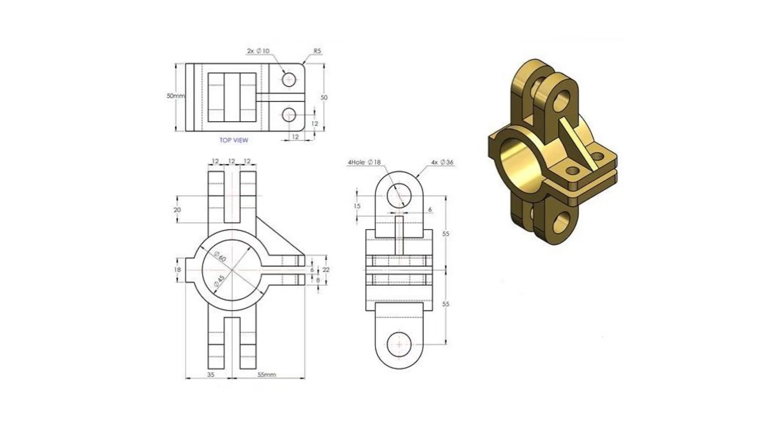In this video, I'm going to walk you through how to model this object in Solidworks, from the very first sketch all the way to the finished, colored part. Let's jump right in. We're going to start on the front plane.

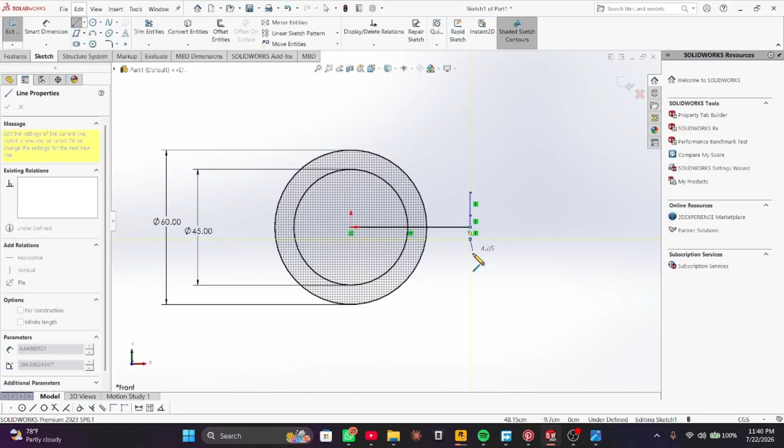Once you're in your sketch, draw two circles from the same center point, one with a diameter of 45 millimeters and another larger one at 60 millimeters. Next, draw a line to the right side of both circles. Then add four vertical lines, two near the top and two near the bottom. For the two lines closest to the center, set their length to 3 millimeters. For the outer lines on both ends, set those to 8 millimeters.

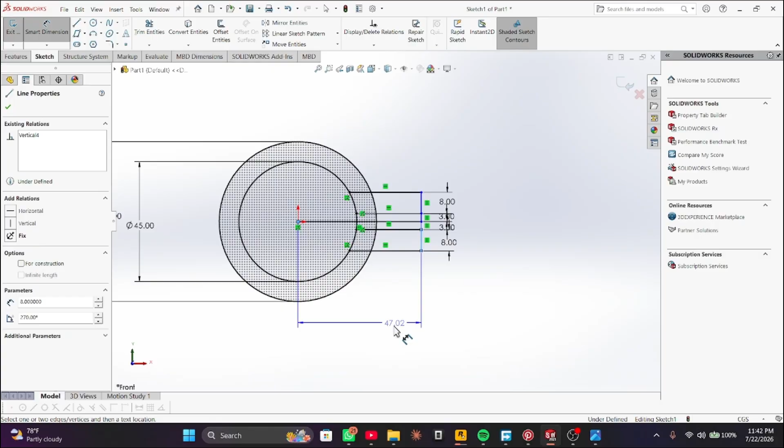Now connect the ends of each of these lines to the circumference of the circles, so everything ties together into one continuous shape. Once that's done, go back and set the length of those vertical lines, measured from the center of the circle, to 55 millimeters. This stretches the shape out to its proper size. At this point, go through and delete all the unnecessary construction lines, leaving just the clean outline of your final shape. Now we're going to add a second feature.

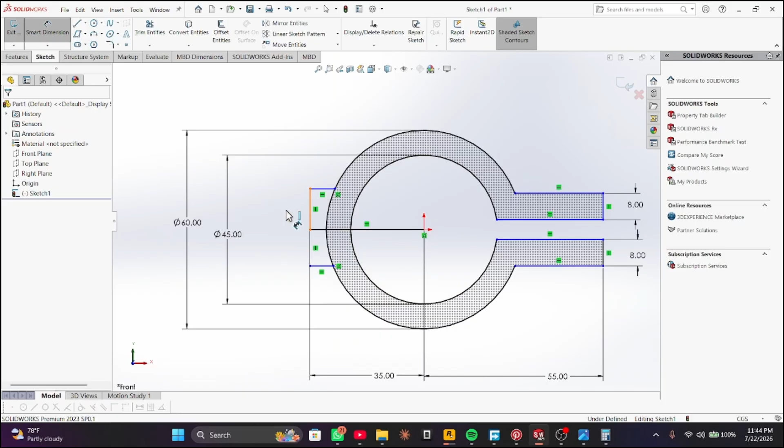Draw a horizontal line from the center, going to the left of the circle, with a length of 35 millimeters. From the endpoint of that line, draw one line going upward and another going downward. Then connect each of these to the circumference using horizontal lines. Set the height of both of those vertical lines to 9 millimeters. Once again, clean up the sketch by deleting anything you don't need.

With the sketch finished, head over to the Features tab and select Extrude. We're going to extrude this shape in both directions, so click direction 2 on the left side of the tab and set both sides to extrude 25 millimeters.

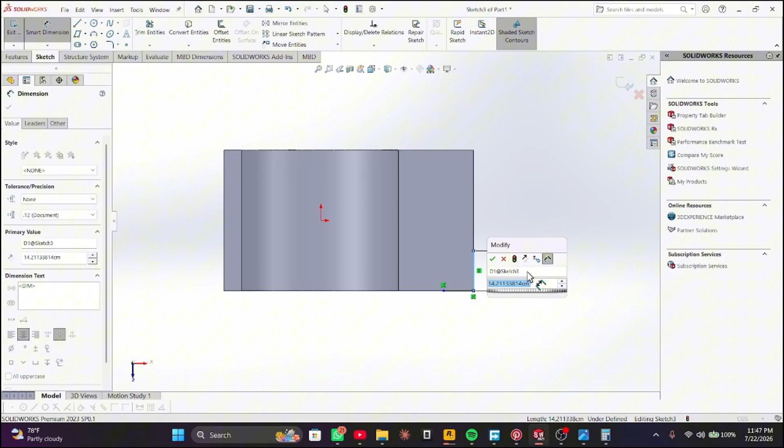Now start a new sketch on this surface. Select this edge and draw a line from the edge going to the left and another going up. Set both of these lines to 12 millimeters. Repeat the same process on the opposite corner. Now draw another line from this point and drag it until you see a blue dashed line appear. That's Solidworks telling you this line matches the length or the position of the line parallel to it. Do the same thing on the other side. At each of these points, draw a circle with a diameter of 10 millimeters.

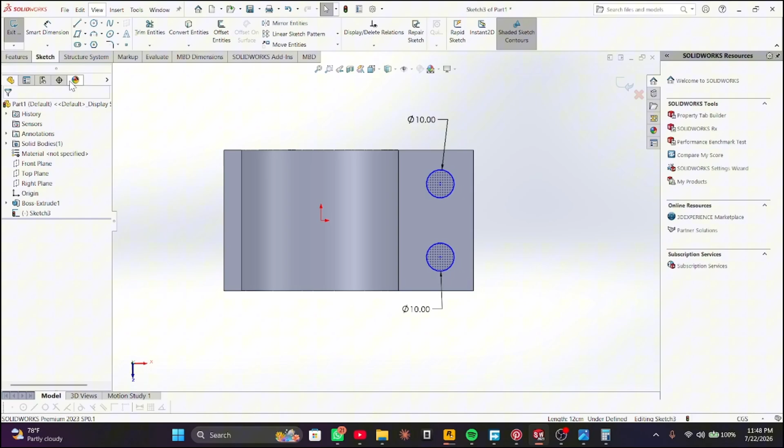Head back to the Features tab, but this time, select Extruded Cut. Use this to cut a hole straight through the object. Once you click it, you'll see a yellow arrow showing how far the cut goes. Drag that arrow until it passes completely through the object and click OK. Now select these edges and click the Fillet tool up in the top tab. Set the fillet length to 5 millimeters and click OK to smooth out those edges.

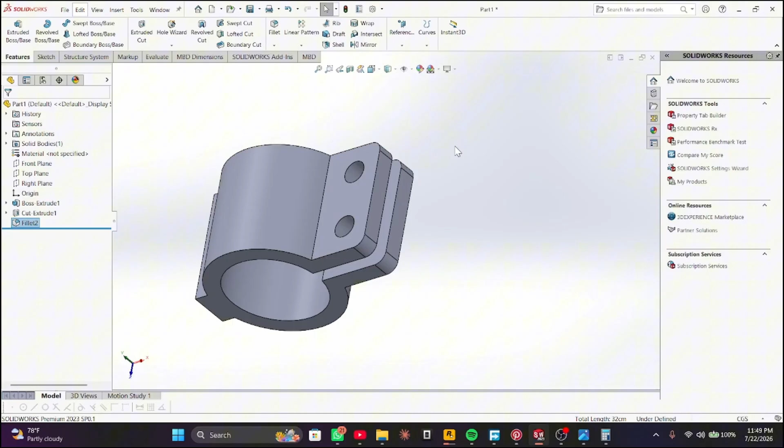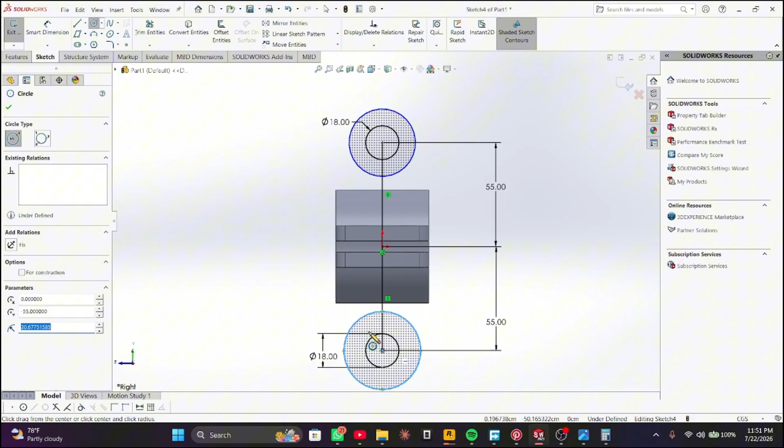Now, let's focus on the two tall structures on the top and bottom of the object. Start by selecting the right view for your next sketch. Draw a line from the center, going up, and another going down, and set both of these to 55 millimeters. At the endpoint of each line, draw a circle at 18 millimeters diameter, and then draw a second, larger circle on the same point at 36 millimeters. Connect the edges of both outer circles together and delete any extra lines you don't need. Once your sketch is ready, extrude it in both directions, 18 millimeters on each side.

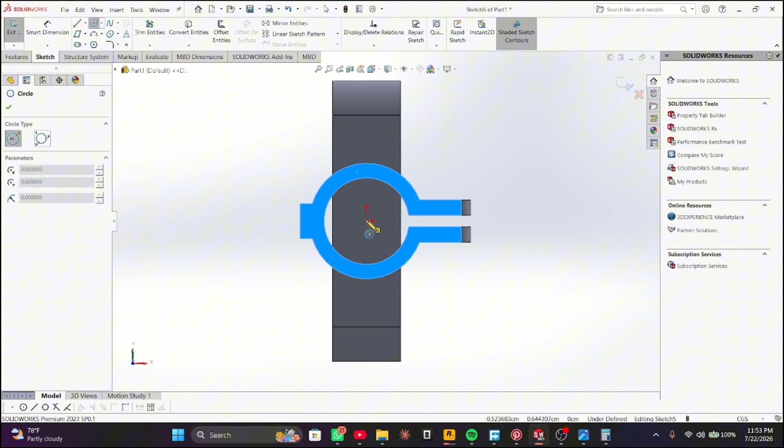Now we need to remove the section covering the hole we made earlier. Select a surface like this one and draw a circle from the center out to the edge of the hole. Then use Extruded Cut again, drag the arrow until it passes through everything, and click OK. That clears out the hole.

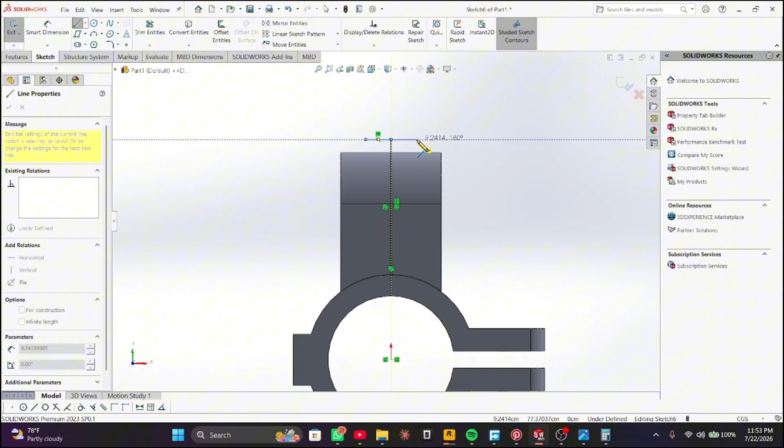Next, click this surface and start a new sketch. Draw a vertical line from this point up to any point that doesn't touch the surface of the object. Then draw two horizontal lines from the endpoint, one to the left, one to the right, each set to 6 millimeters. Connect their ends to the circumference of the circle. Then grab the Arc tool from the sketch menu, connect those two endpoints, and shape the curve to match the curve of the object at that point.

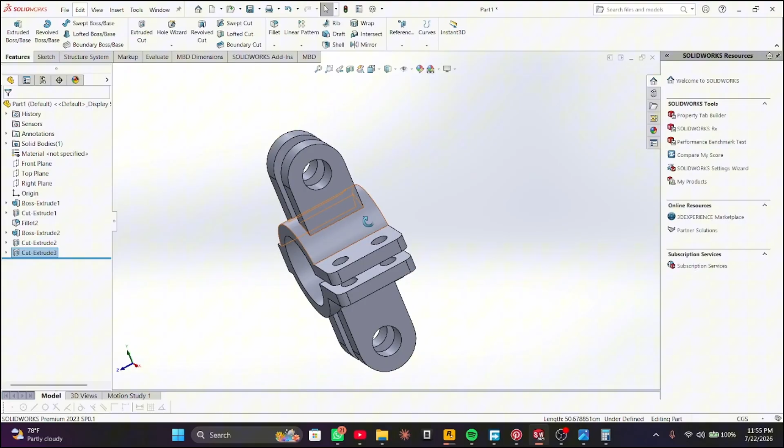Repeat this exact same process on the bottom end of the object. Then once both sketches are done, use the Extruded Cut tool to create the groove in the middle of this part. Finally, let's create the slanted section on the side.

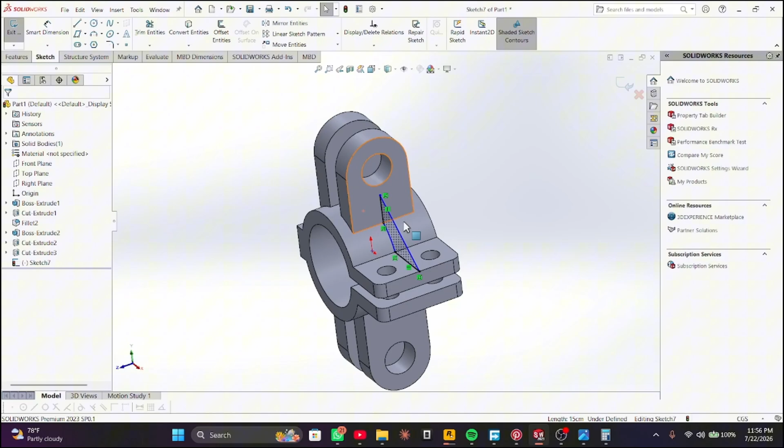Select the front plane to sketch on. Draw a line downward from this point and set the length to 15 centimeters. Connect the endpoint of that line to this other endpoint. Then use the Line and Arc tools to trace out the full outline of the object at this section. Delete any extra lines once you're done. Click Extrude and extrude on both sides to a length of 3 millimeters.

To finish things off and make the part look a little more polished, click the Appearance icon and choose a color from the panel on the right. Then click OK. And that's it. You've just modeled this entire object in Solidworks.